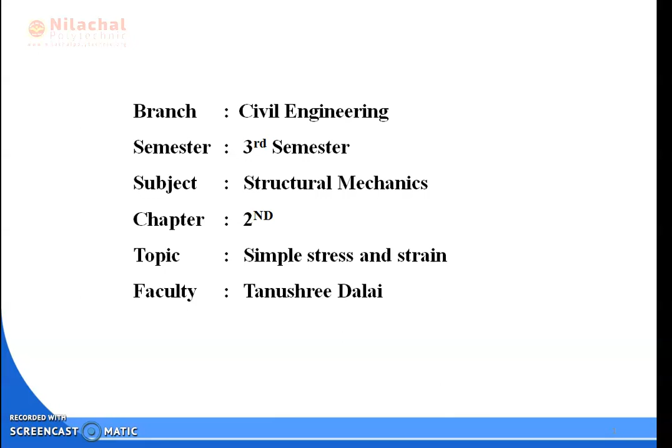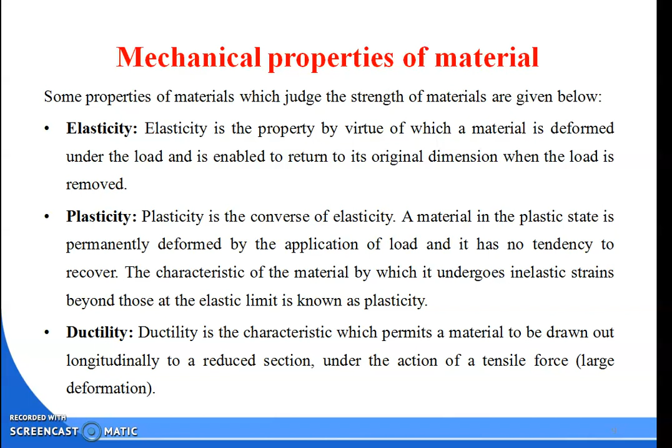My name is Tanushree Dalai from Civil Engineering branch, and today I am going to teach you your Theory 1 paper, which is Structural Mechanics. In the previous class we discussed the mechanical properties of the material: elasticity, plasticity, ductility, malleability, toughness, hardness, brittleness, and rigidity.

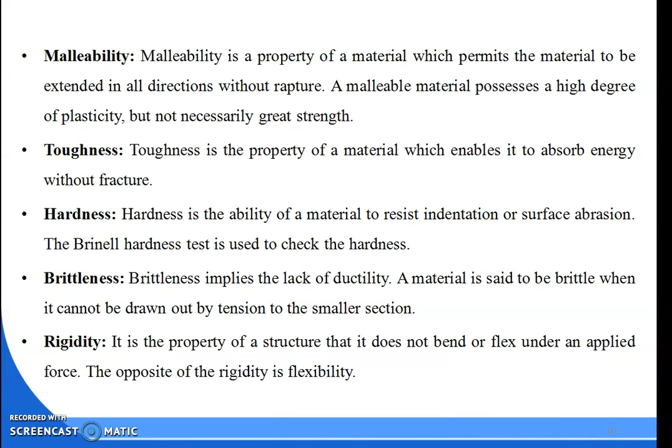So today we will discuss the next mechanical property, which is creep. Creep is also known as cold flow. Why? See, it is the tendency of the material by which it can move slowly or deform permanently under the influence of stresses. So it is the time-dependent deformation when a material is under constant loading.

It can occur as a result of long-term exposure to high levels of stress that are still below the yield strength. So overall, creep is the property of the material by which a body can deform permanently, but in a slow process, due to the loading system. It is also a time-dependent deformation.

That means, with time, day by day, due to the loading system, the creep value increases. And the creep value is always below the yield strength. Yield strength means the maximum capability, or the optimum stress or strength, exerted by the object or the body.

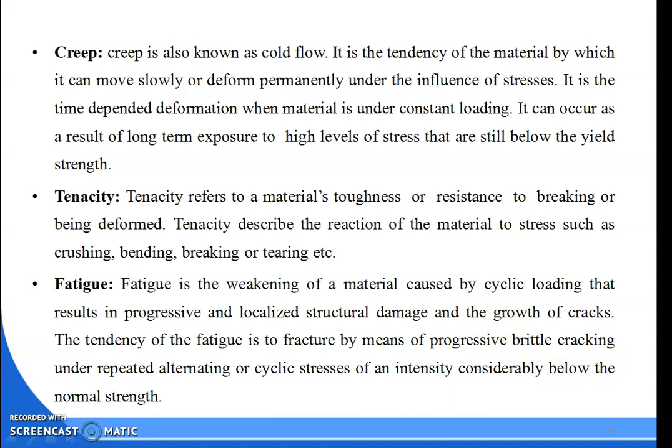Next is durability. From the beginning of the class I told you that durability is the ability of the structure or the material to be durable for a long lifespan, that means the longevity of the material or the structure.

It is the ability of a material to resist weathering action, chemical attack, corrosion, abrasion and other destructive forces which can be harmful to the structure during its useful life. Durability of materials is affected by their physical, chemical, thermal, electrical and mechanical properties.

It is defined as the ability of a material to remain serviceable in the surrounding environment during its useful life without damage. Next is stiffness. Stiffness is similar to the rigidity of the body. Stiffness is the extent to which an object resists deformation in response to an applied force.

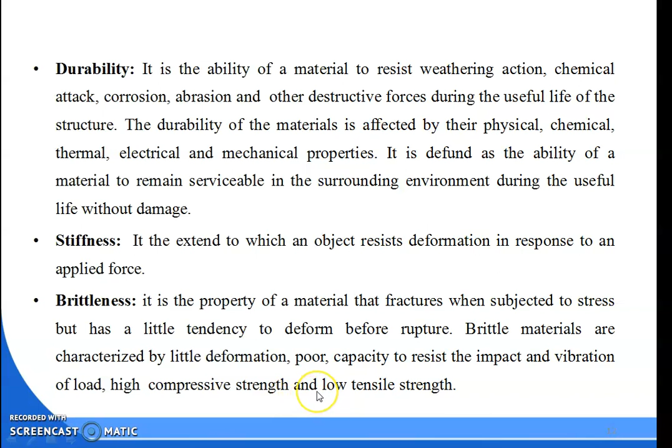Brittle materials are characterized by little deformation, poor capacity to resist impact and vibration loads, high compressive strength and low tensile strength. So these are the two types of material. In the previous class I told you that materials are of two types: ductile material and brittle material.

So what do you mean by ductile material? Materials which have the ability to undergo significant plastic deformation under tensile stress before rupture. In other words, if a material is ductile, it can be stretched under tensile load. Examples are steel, copper, and aluminium. These are known as ductile materials.

Next is brittle material. Brittle material is the opposite of ductile material. Material which breaks without any significant plastic deformation under tensile stress is known as brittle material. In other words, a material with sudden failure without any notice under tensile load is brittle material.

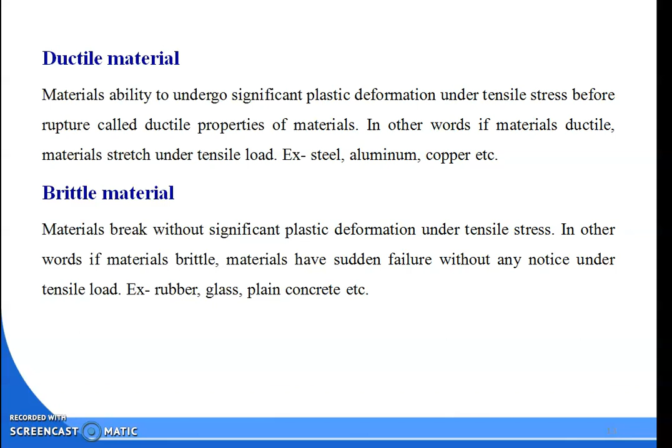Next is deformation of axially loaded members. We will discuss this part in the next class.